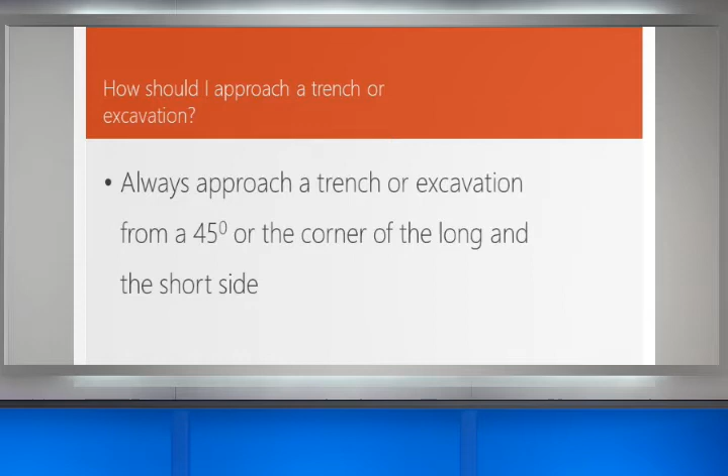So, having said that, when you approach a trench, you really want to approach it at a 45-degree angle, or from the corner of the long and the short side of the trench. There's going to be a few reasons why we do this, or at least two reasons. One reason is this is the most strength you're going to have in the earth beneath your feet. So this is where the dirt's going to be the most cohesive, and this is going to give you the most stability.

If you cannot approach from a 45-degree angle, or the corner of the long side and the short side of the trench, the next best way to approach is the short side. Having said this, short sides of the trench collapse all the time. Just because rule of thumb is it's a little bit safer direction to approach from than the long side doesn't mean it's completely safe.

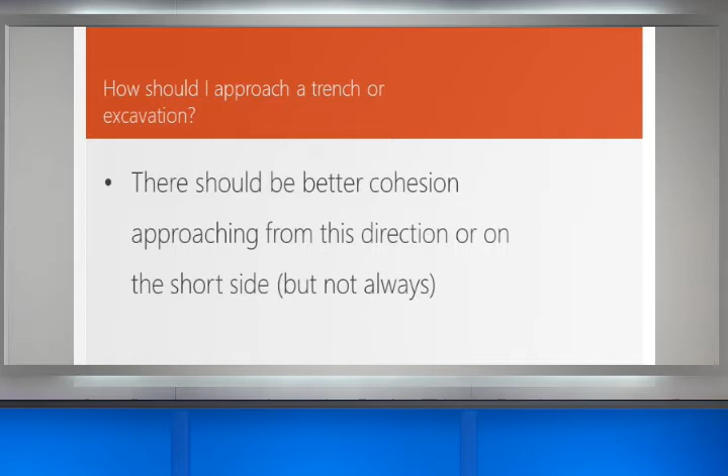So keep in mind the safest way is to approach from a 45-degree angle, where the long side and the short side walls of the trench meet. Or if you can't do that, the next safest, although not completely safe, is to approach from the short side. Keep that in mind. That's what we want to do.

So if you look at this diagram, you'll see where the corners are typically the strongest point of the trench walls. And hopefully you can see from the diagram that there is quite a bit of earth beneath your feet when you approach this way. When you approach this way, not only is the ground more stable, but it gives you a really good vantage point to look for horizontal and vertical cracks, which we're going to talk about a little bit more as we go through this presentation.

So, two reasons to approach from the corner. One, it's where the ground is most stable, and that's important. Two, it gives you a good vantage point to look for, one, horizontal cracks, and two, vertical cracks.

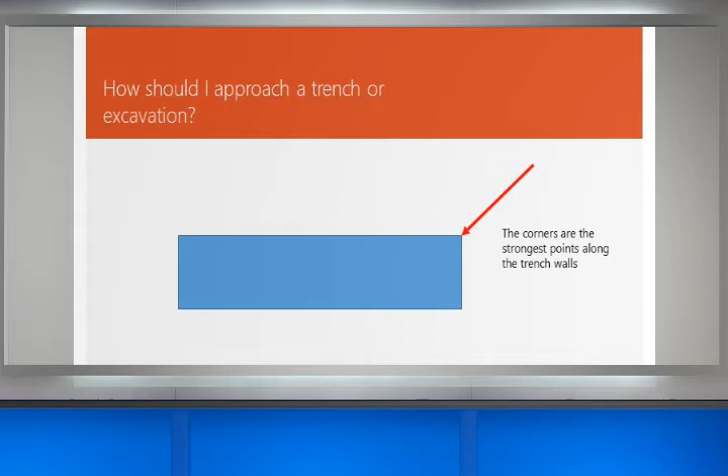These are all important. Now, even though I talked about approaching from a 45-degree angle to a corner, please look at this diagram, because once in a while you have to make L's, you have to make T's in your trenches, and typically when you look at the arrow, these corners at the L's and the T's are the most unsafe place to be when standing next to a trench. As you can see by the diagram, what typically happens is you only have one quadrant underneath your feet that's stable, if you approach a trench from this location.

And it's not really stable, because if you pay attention, anytime there's a corner exposed like this in a trench, whether it be from a T or an L, there's usually a partial collapse that happens right there at that corner. Almost never do those corners from a T or an L in a trench stay cohesive. Most of the time there's a partial collapse.

And you may be sitting there thinking, well, it's not really a collapse. There's just some dirt that rolls off the top of it because it's unstable. Well, even that is considered a partial collapse. So keep that in mind. It's a partial collapse or the start of a collapse. These are weak points right here, typically L's and T's.

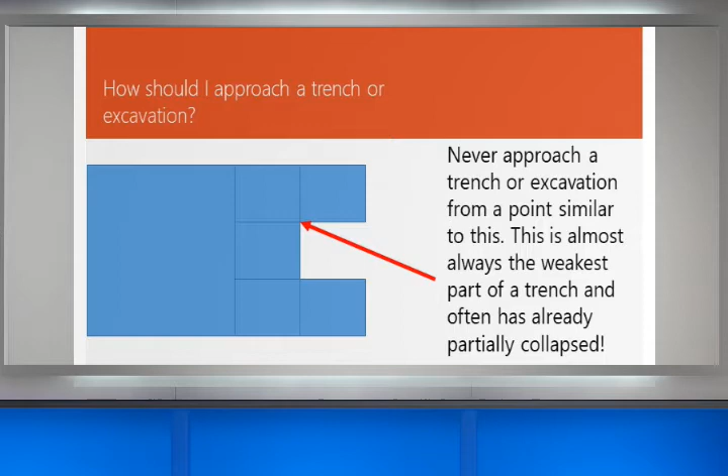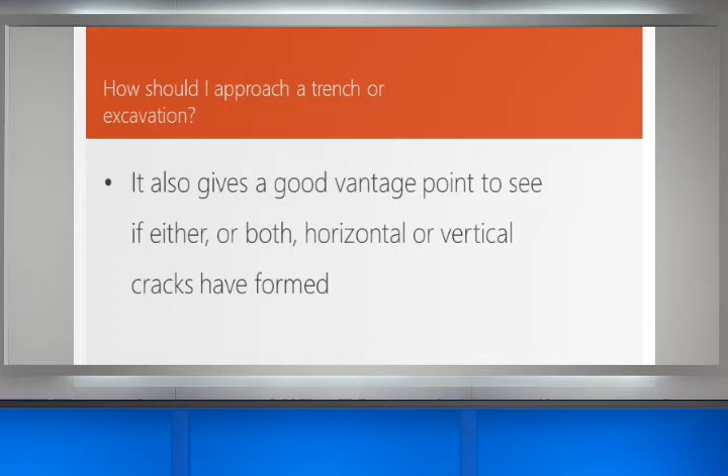So, as I said before, when you approach from a 45 or where the long side and the short side of the trench walls connect, it gives you a good vantage point to see if either or both horizontal or vertical cracks have formed. So horizontal and vertical cracks are a big deal, and we'll see why they're a big deal. So as you approach the trench or the excavation, you want to start looking for cracks in the earth's horizontal surface.

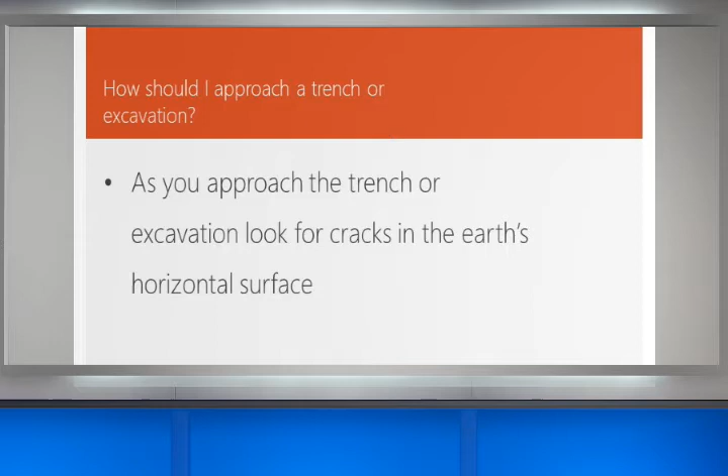Look for cracks in the Earth's horizontal surface. This is really important to do. Rule of thumb, you want to look for horizontal cracks approximately 1/2 to 3/4 of the distance of the height of the wall. So, if the trench is 10 feet deep, somewhere between 5 and 7.5 feet back from the wall of the trench on the ground is where you're going to most likely see horizontal cracks form.

Now, this isn't absolute, okay? Cracks can form much closer or a little bit further back. We're talking about rule of thumb and what typically happens here. So pay attention for horizontal cracks all around, but you want to pay particular attention to half the distance of the depth of the trench to 3/4 of the distance of the depth of the trench back. So, like I said in my example, if the trench is 10 feet deep, you want to start looking for horizontal cracks 5 to 7.5 feet back.

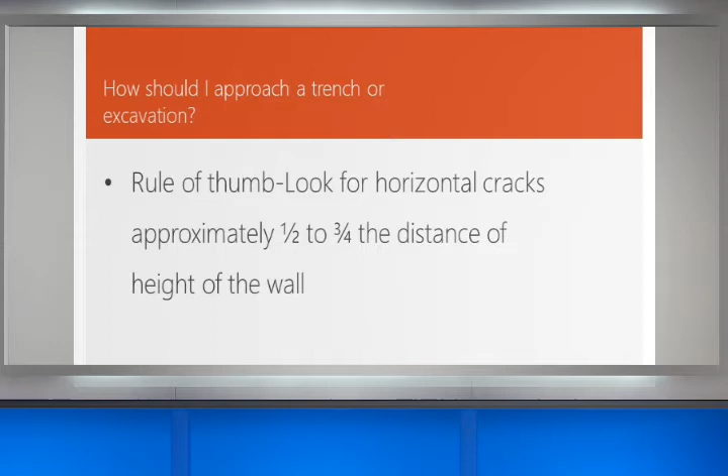Keep that in mind. So as you get closer to the trench and as you've been looking for horizontal cracks, once you can see inside the trench, you want to look for cracks in the trench's vertical walls. A lot of times these form as a result of vibration, whether there's been some kind of traffic nearby, whether someone's been using a jackhammer nearby, or there's construction going on, or heavy equipment, whatever it may be. A lot of times you have vertical cracks form, and they are a result of vibration near the trench.

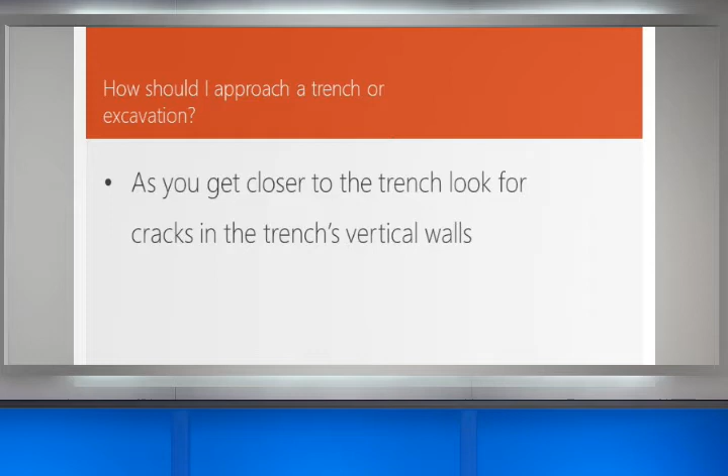Keep that in mind. What do horizontal cracks mean? Well, horizontal cracks mean the cohesion is weak and a collapse is imminent. If you see horizontal cracks forming as you walk up to a trench, you need to start telling people to get out. You need to tell them to get out quick because a collapse is imminent. Same thing with the vertical cracks in the walls, but horizontal cracks, absolutely.

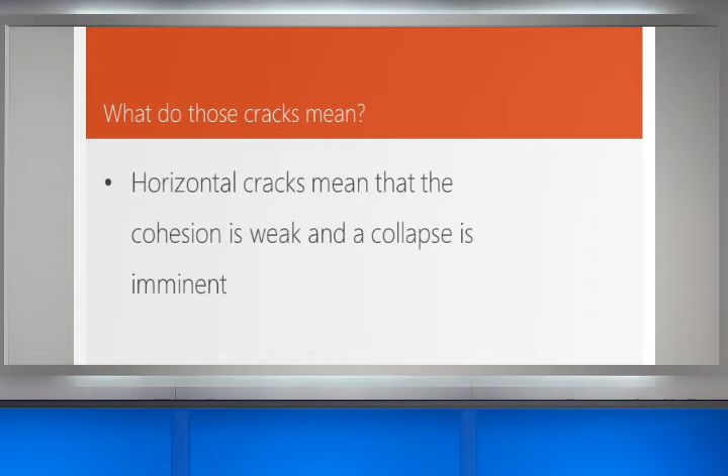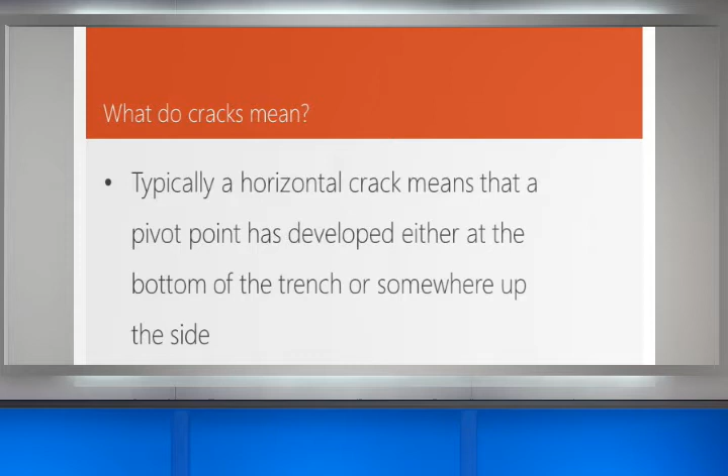Because what it means is that a pivot point has developed either at the bottom of the trench, it's called the toe, or somewhere just a little up from the bottom of the side. And what happens is when those horizontal cracks form, that means this big wedge of dirt is about to pivot away from the earth and into the trench. Pivot away from the earth and into the trench. So keep that in mind.

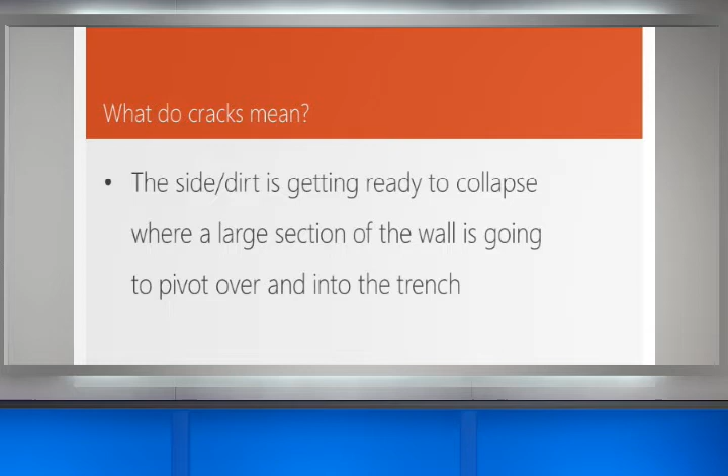The reason they call it the toe, the reason we talk about pivot points when we talk about horizontal cracks as you approach a trench, it really means that as that crack forms, it's about to let go and all that dirt is going to pivot into the trench. Of course, if you're standing on the side of the trench wall, you're going to go into the trench. If you're already in the trench, it's coming down on top of you. It's a bad situation. It's a lot of dirt, and it's going to get you stuck in there, and that's not a good thing.

A vertical crack means the side of the trench is about to, quote, slough off and slide into the trench. Now, typically, this is not as much dirt as with a horizontal crack and a big piece of dirt pivoting and falling into it, but it is still dangerous. It still can kill people. It still can maim and hurt people. And you can go into the trench as this side sloughs off and get hurt just like you could if you were in the trench and it fell on top of you.

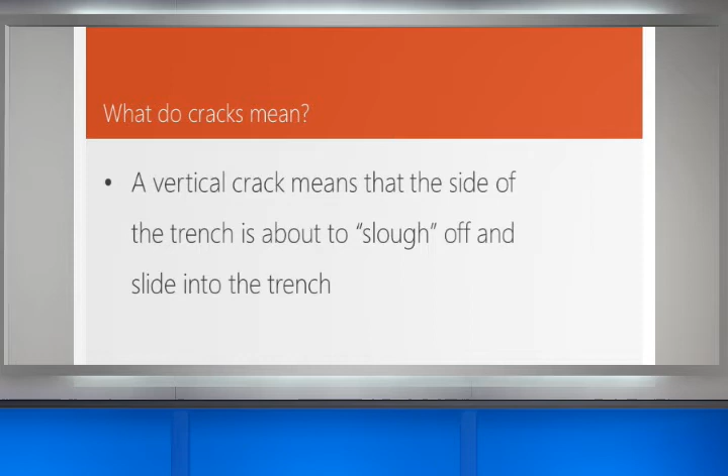So this is why you look for horizontal cracks as you approach. It's why you look for vertical cracks once you get there and you can see the inside of the trench walls. So keep that in mind.

Something to remind you of, and I know you probably hear a lot of people quote all these figures to you, but a cubic yard of dirt can weigh between 2,000 and 3,000 pounds. It just depends on how much sand, clay, gravel, what the makeup of the dirt is in the part of the world you're digging in. Sometimes you can find more clay, sometimes you find more sand.

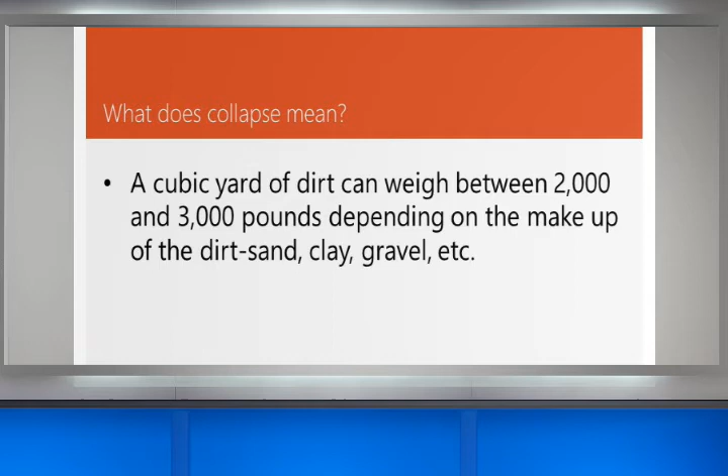Here in Tennessee, with the three sections that we have, East Tennessee, Middle Tennessee, and West Tennessee, you're going to find a combination of all of it: rock, clay, sand. And however it's made up is going to have a lot to do with how cohesive the soil is, how stable it is, and how much it weighs. So that's a pretty important thing to keep in mind.

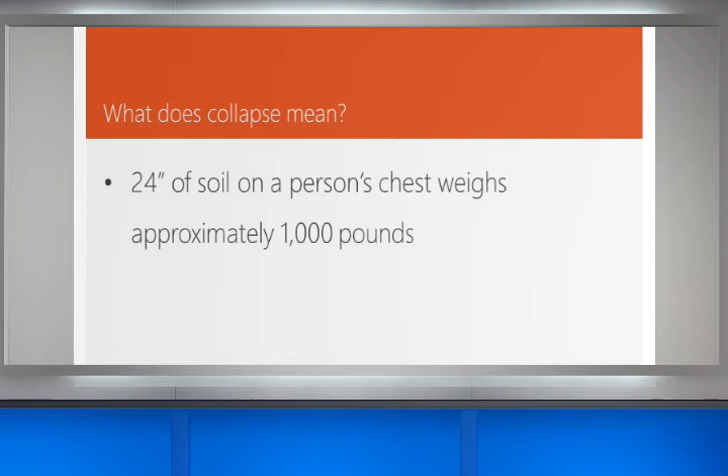Another thing to keep in mind is that 24 inches of soil on a person's chest weighs roughly 1,000 pounds. And you're going to have a hard time breathing with 1,000 pounds sitting on your chest. The diaphragm below your rib cage, that's the muscle you use to send air out of your lungs and breathe air in. It's just not going to be strong enough to move 1,000 pounds. It's going to compress once you leave your last breath, and you're not going to be able to take in any more air after that.

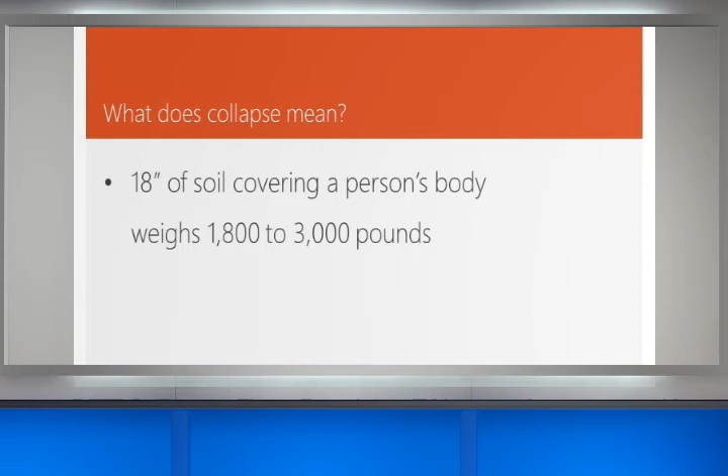18 inches of soil covering a person's body, there again, weighs between 1,800 and 3,000 pounds, depending on how much gravel, rock, clay, all those different components that make up dirt. 1.5 feet of soil over your head, you are not going to breathe. Your pulmonary cavity just cannot lift that much weight. So guess what? You don't breathe. And if you don't breathe, you're not long for this world. It's just the cold, hard facts of it. I wish it wasn't, but it is.

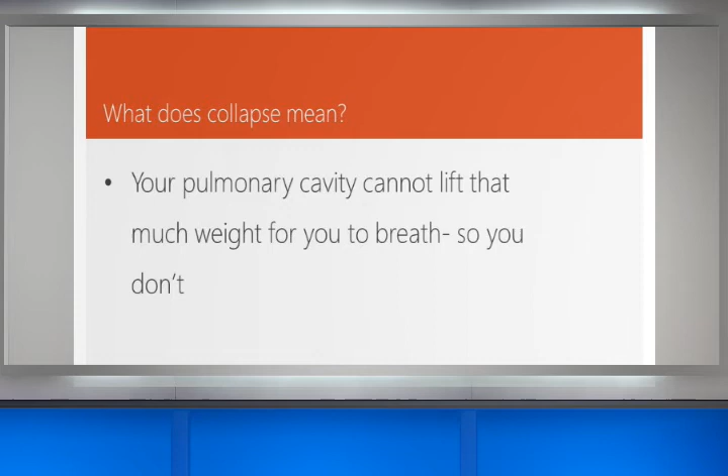And that's why we have to be vigilant when we approach these trenches. It's why we need to pay attention to horizontal cracks in the surface and vertical cracks of the trench walls. Know the signs when a trench collapse is imminent, and take actions, warn people, and do the things we need to do to keep people safe. It's also why we slope the sides of the trench back, why we use trench boxes, why you have access to a ladder every 25 feet. All these are important to keep yourself safe while you're in the trench working, or on the side of the trench.

Most of the time we slope the sides. If you're in stable rock, you can have sides really vertical, 90 degrees up and down. The trouble is, very rarely are you going to be in stable rock. So keep that in mind. Now, Class A soil, you can have a slope of 53 degrees, which is still a pretty good slope. It's not vertical, but it's still a pretty decent angle.

Pretty steep. Now, if you have Class B soil, you can have it at a 1-to-1 or a 45-degree slope. And even a 45-degree slope can be pretty daunting. But you typically have a lot of clay there. It's not been previously disturbed, and you can do some visual and mechanical tests. Use a pocket penetrometer. You can define how cohesive the soil is, and you can move on from there.

Now, Class C soil is typically what most people dig in. In fact, most utilities just assume that they're digging in Class C soil. Class C soil is defined as Class C because it's already been previously disturbed. If there are pipes or lines in the ground, somebody had to dig there and put them in. So almost always when you're doing repairs, it's going to be Class C soil. Also, contractors dig, move dirt around, things like that.

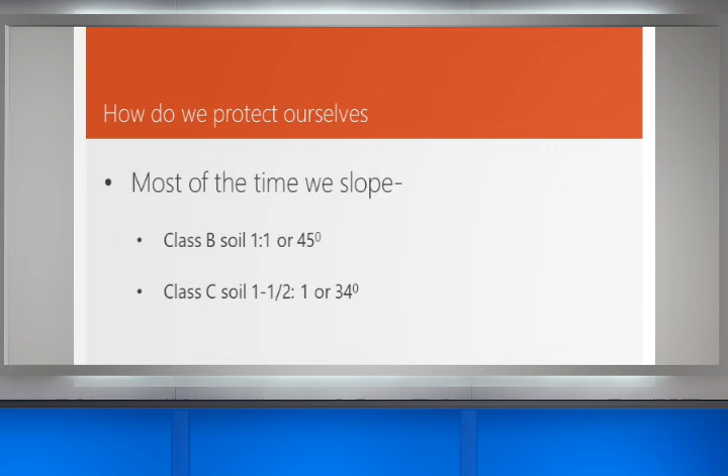So sometimes it's just not possible to slope or bench. You don't have any room. You're right beside pavement or blacktop, or you're next to a building. So if you're going to do that, you typically have to use a box or a shield. So if you do, you do. It's a very viable way to protect yourself. Make sure it's in good shape.

Look it over. Make sure you have the engineering information with you. If you do have some tears in some of the walls, contact the manufacturer. A lot of times, if the tear's not at a critical part of the protective system, it's no big deal, and the company will tell you go ahead and use it. It's not critical. Sometimes if there's a tear in the side of the shield or the box, it is at a critical structural part of the box, and they'll tell you what you have to do to repair it. So keep those things in mind.

Always look over your trench box. Always make sure it's in good shape. Go ahead and make use of those things. I know there's a lot of times I've gone up on site and people have had a trench box sitting over there on site just so people won't bother them. But then there's people in a 5 foot deep trench with a perfectly good trench box, and they're not using it. So don't be those people. You've got a tool there, use it.